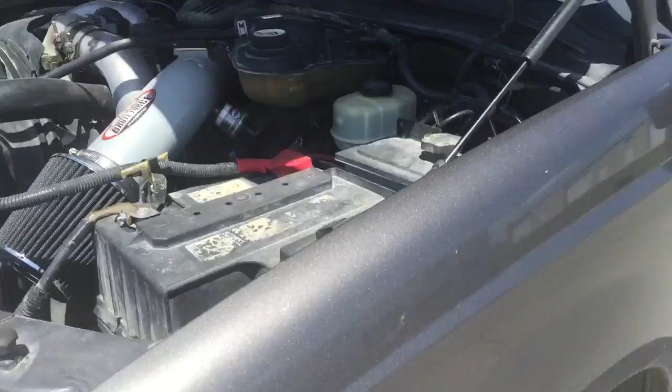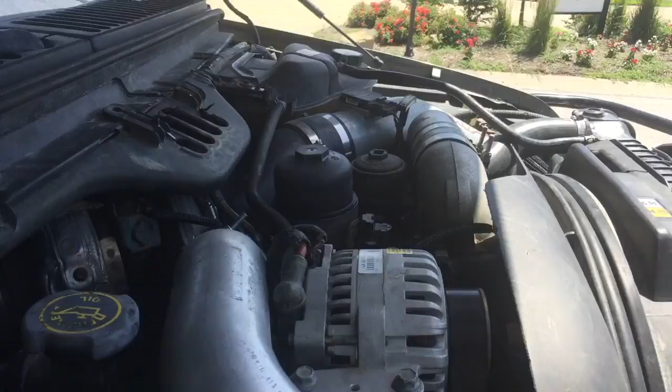Got Jarred's truck here. I think it's, I don't know, 04 probably. Let's see. But no, it's an 03 engine. So what we've got off the bat is the wrong oil filter on it. We need to get a Motorcraft filter, possibly a Motorcraft cap, and it's got green coolant in it.

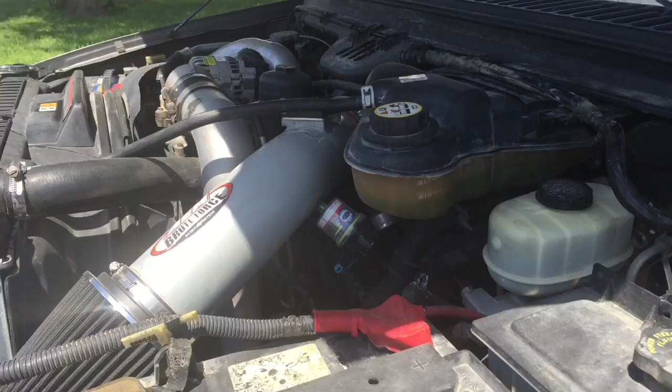So we're about to cold start it real quick. Let's cold start it, see what the injectors look like, and then we're gonna do an oil cooler diag while we're doing a VC9 flush. So hang on a second.

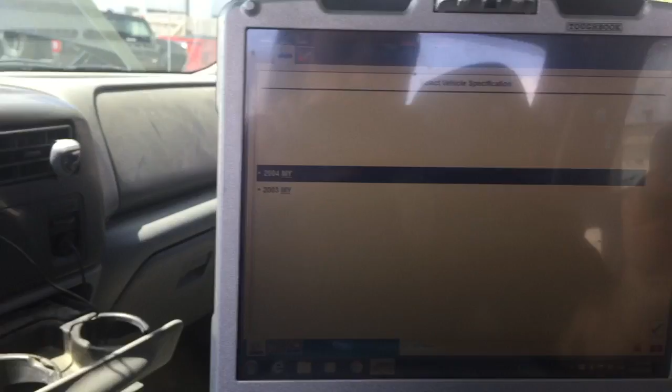This is a straight up 03 engine, so we are gonna have to do another intake. If we put our intake on it, we're gonna have to buy another intake. They're running about 150 bucks on eBay, but we don't use the 03 intakes. So yeah, this one's gonna have to have one. Let me get some screens set up here. I know the VIN says it's an 04, but the engine is a straight up 03. So hang on a second.

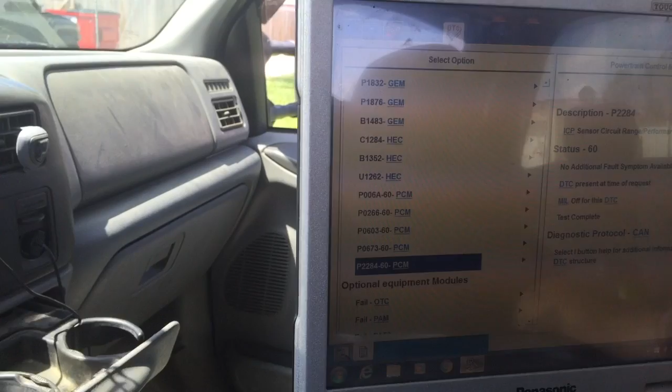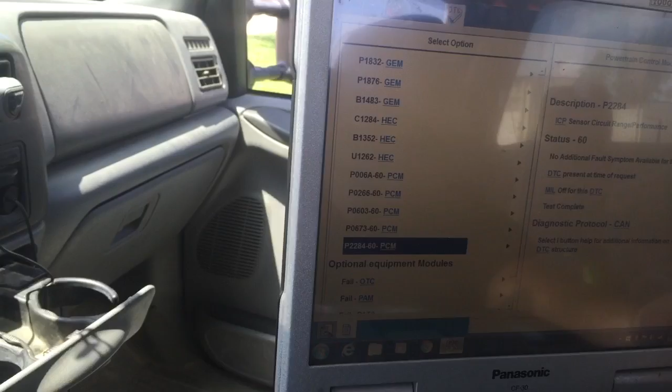Okay, we got a circuit range performance for ICP, which with this 03 engine, anytime we go in, we put a new ICP sensor in it. We'll look at the pigtail, see how it looks, because I know a lot of people replace the ICP sensor and the pigtail, but it's just not needed, unless the oil has deteriorated the insulation on the wire or the harness itself. But I'd imagine this probably has an oil leak from the ICP sensor.

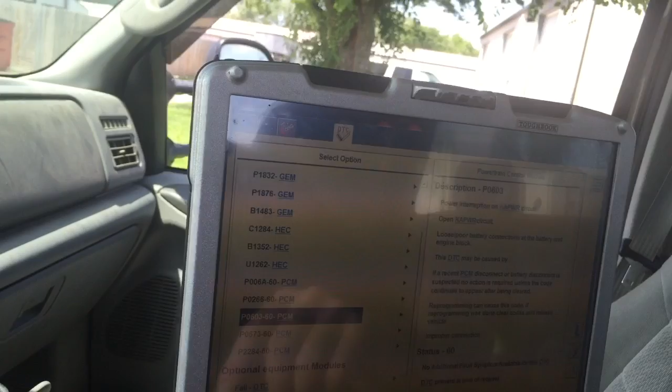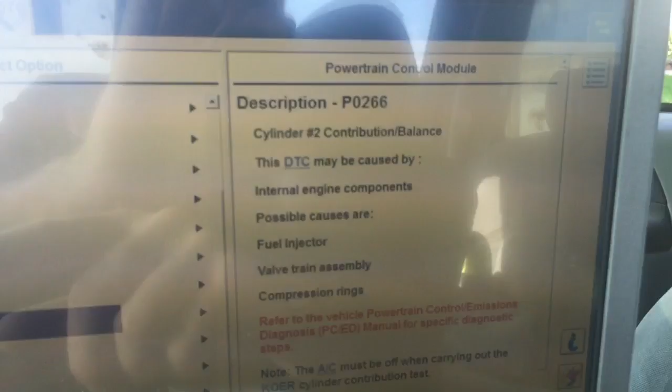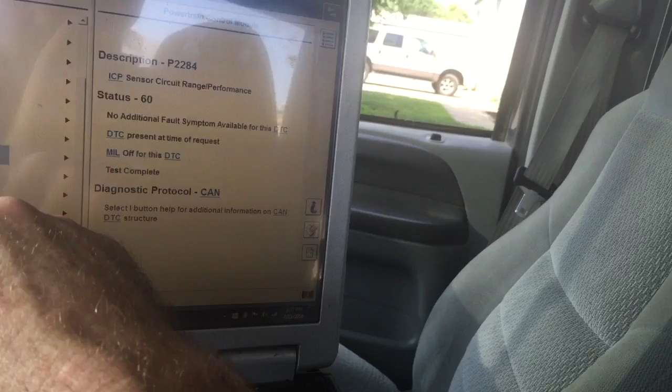We got cylinder 3 glow plug code and keep alive circuit. So maybe we got a loose connection on the driver's side battery, little 10mm on it. Cylinder 2 contribution balance. Mass air correlation, which, being an 03, it's a tough animal. I'll have to really check the exhaust manifolds, but it does have an aftermarket air filter on it. But this is a MAP correlation, so we'll have to look at it when we get further in. But we do have cylinder 2 contribution balance.

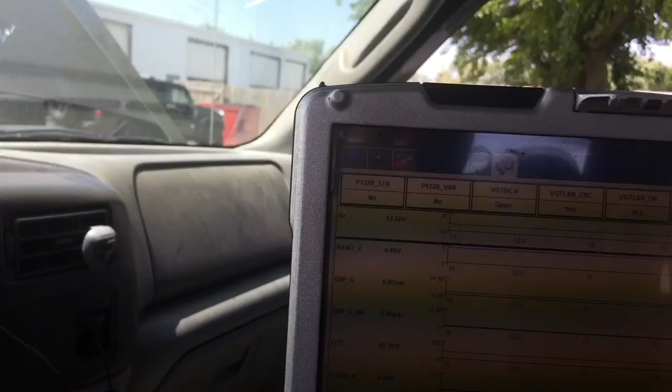So I'm going to go ahead, get it ready, and fire this up. Well, actually, let me get some more screens set up. Hang on. Okay, key on, engine off. It is showing that the VGT has learned, so we don't have an issue there. There's no variance, stuck vanes, or anything on 132B, so that's good. Hang on. Okay, here we go. We're gonna fire it up.

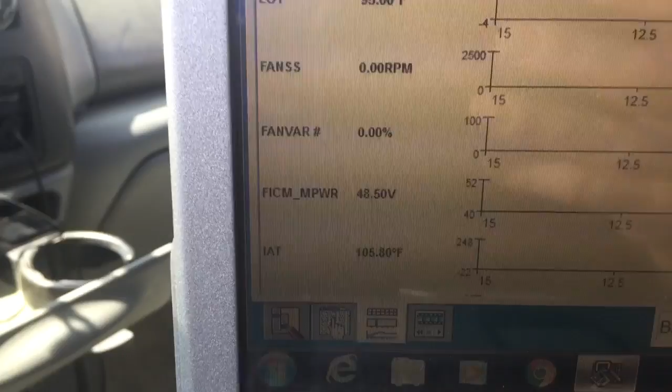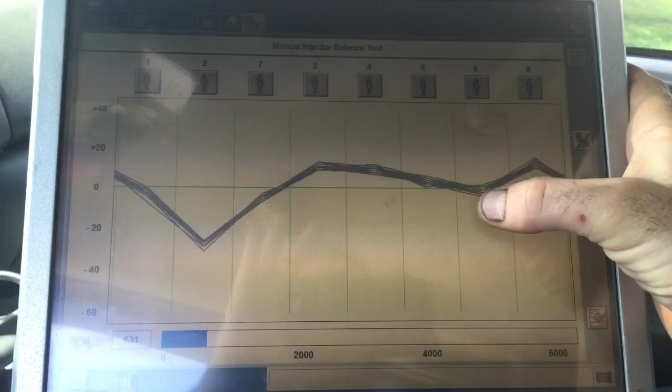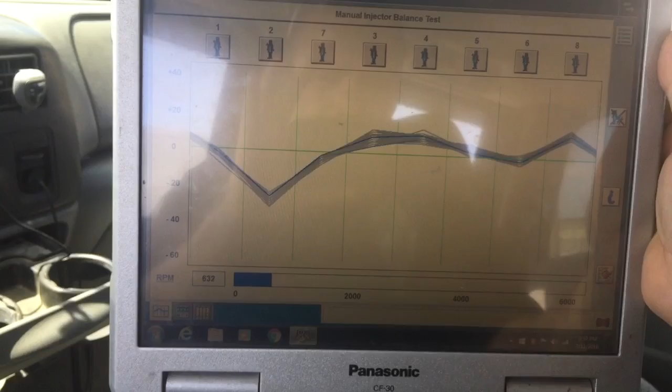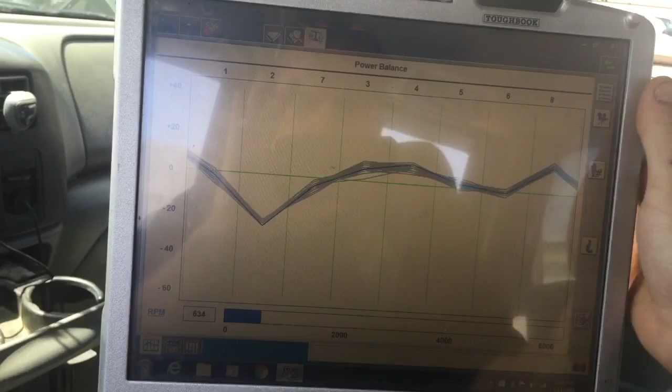Number 2. Fuel compensation, see how bad any of the other ones get. Might be a little suspect on number 6 right here. But definitely number 2. Number 2 needs to go. I would say number 2 and number 6, and leave the odd side alone. Let's just watch it for a second. Number 7's kind of getting worked a little bit. It's not picking all the way up past the line. That's on the other side, but it would definitely start a hell of a lot different if we just get number 2 out.

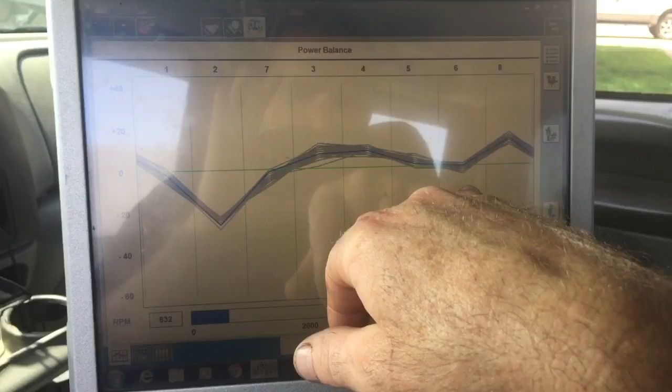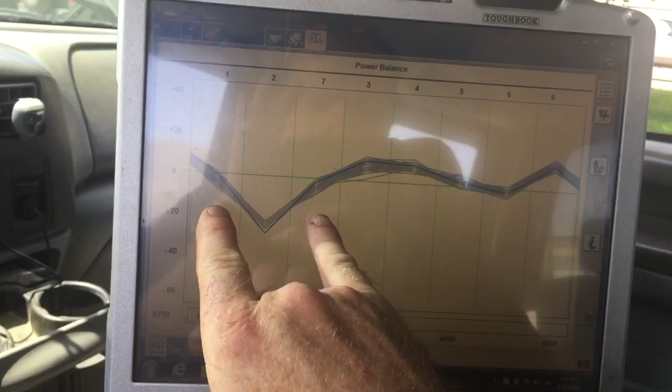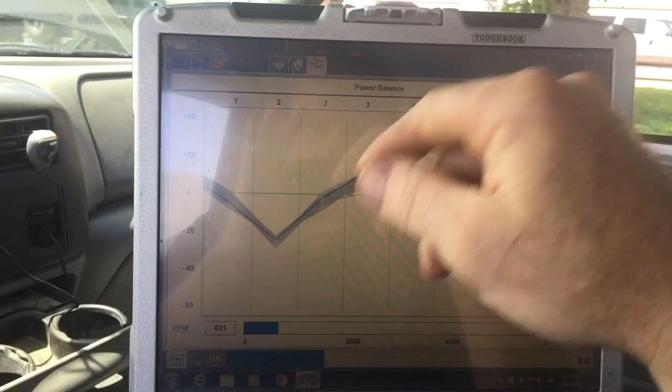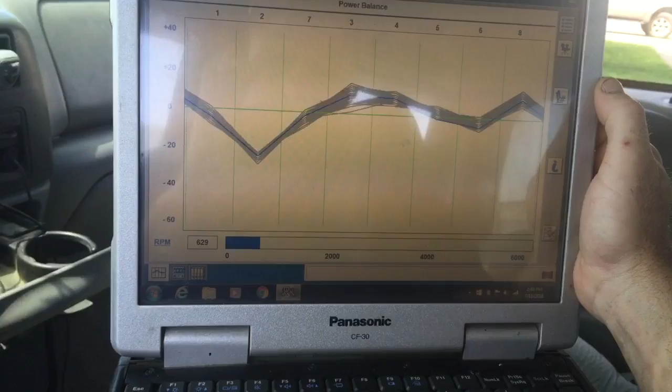Number 2, leave it up to you on number 6. Number 4 and number 8 look okay. But we got number 2 throwing the code and everything. Number 1 and number 7 have both been getting worked. Maybe number 2 and number 6, and then we can save the odd side for later. We do need number 6 though. We need number 6 and number 2 by far, definitely. So we're gonna go ahead and get the VC9 flush started and get the green coolant out, and then we'll test the oil cooler.

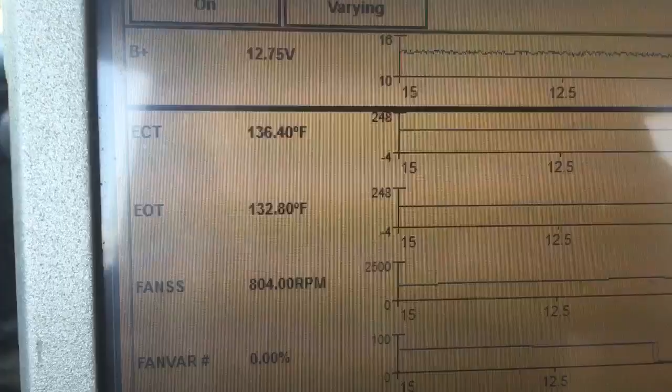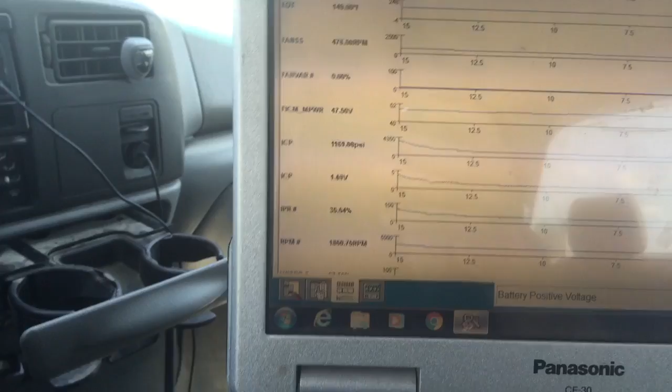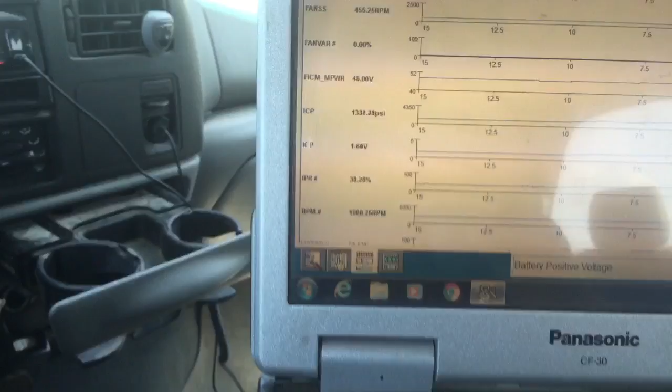Okay, we're gonna take this thing for a drive. Right now, coolant's hotter than oil, that's good. So far, we're looking all right. I'm hearing some air from up underneath. 84% IPR is not good, unless it's tuned. If it's tuned, sometimes the tuning causes it to max out the high pressure pump. It feels like it is, so we might not need to worry about that. But at IPR it should never go to 84, like 77% at the most when you're hammering on it. Let's get it warmed up. The air I'm hearing is the aftermarket air filter.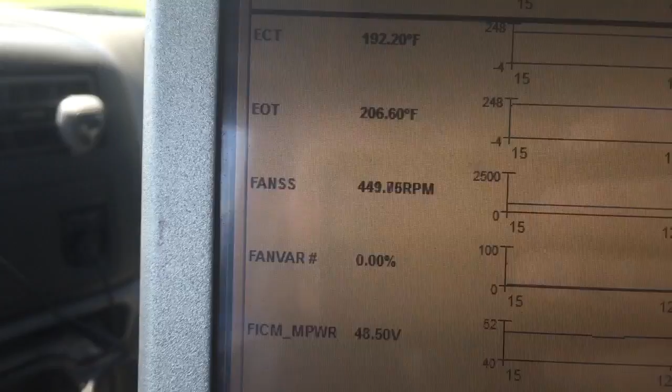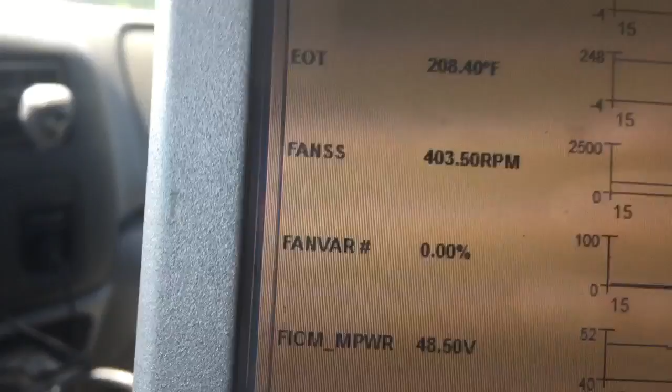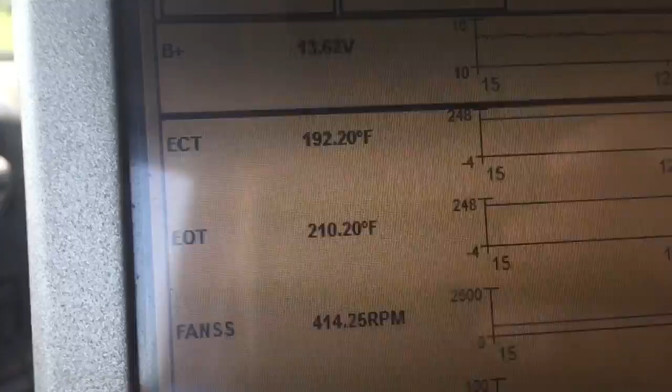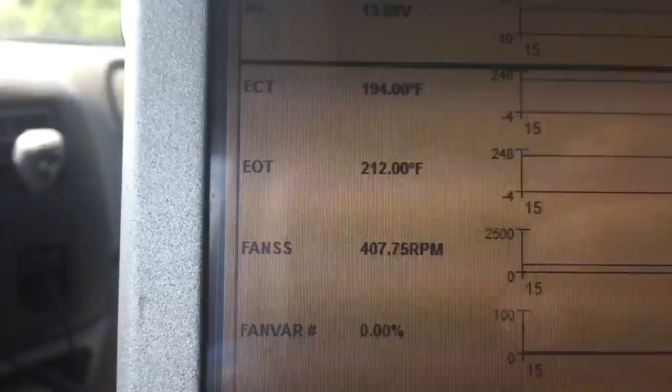Okay, we got oil at 206, coolant at 192. We're hot. Let's see what happens. Okay, oil's creeping up, coolant's going down. We're at 18 degrees right now. Just cruising down the road with the cruise on. Dropped, we're at 16 degrees. Let's see what it settles down to be. Oil's up to 210. So we got 18 degrees right now. Oil keeps going up. We're still at 18 degrees. Oil up to 212. It warmed up really slow.

After the VC9 flush, we might go ahead and throw a thermostat in it too. But we're showing 18 degrees right here, so it needs an oil cooler. We'll get the VC9 flush done, and I've been in the habit of putting coolant in it and then taking it apart, because that way everything's already protected and we just fill it with 50/50. But right now, it needs an oil cooler.

If I can get it to focus going over freaking bridges. There we go.

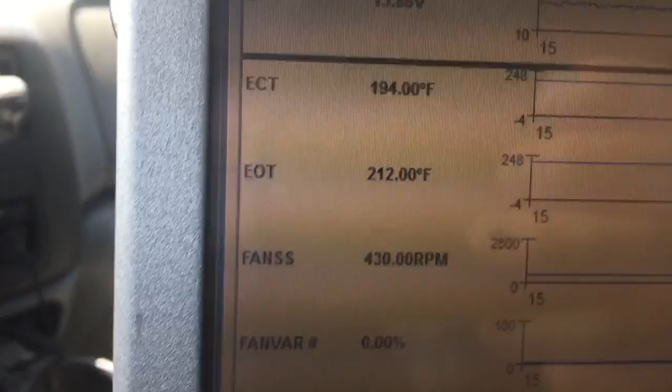194, 212. Well, crap. So number 2 injector, possibly number 6, and an oil cooler. Alright, we'll get the flush going, and maybe we'll have another video here in a minute if it gets any better.